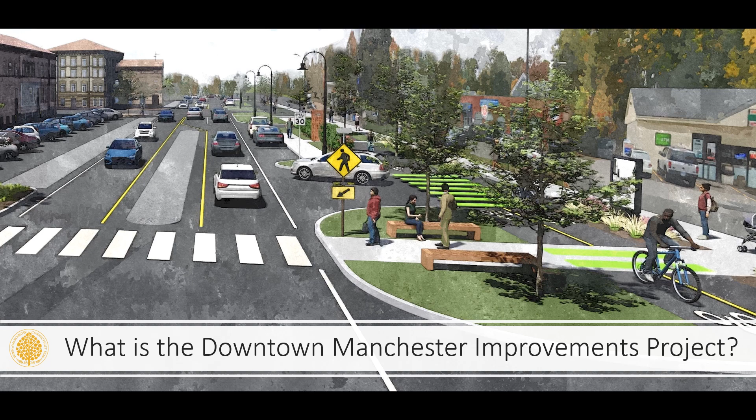The Downtown Manchester Improvements Project, also known as the Downtown Streetscape Project or Downtown for All, is the next phase of the town's recent efforts to make downtown and its adjacent neighborhoods even more vibrant places. This project is currently in the planning stages. It will represent a significant investment in downtown that benefits the entire community, complete necessary upgrades of the Main Street corridor, and address multiple community needs previously identified in various workshops and surveys spanning the past decade.

Over the past several years, the town of Manchester has engaged the public on opportunities and strategies for further improving downtown. These efforts have included conducting a townwide survey collecting feedback on recent improvements, facilitating a strategic workshop to identify priorities, engaging with the Downtown Special Services District, and gathering public input for Manchester Next, the update of the town's 10-year plan of conservation and development. Through these engagement efforts, town staff have received tremendous feedback on the state of downtown and its direction forward.

The Downtown Manchester Improvement Survey highlighted a desire for additional outdoor dining and general public seating while maintaining an adequate supply and distribution of public parking throughout the district. However, public feedback also indicated a general concern about pedestrian safety and the high speed at which cars travel in the area. Unfortunately, downtown is currently considered a high crash corridor and tragically has also seen bicyclists and pedestrians injured and even killed in recent years crossing Main Street. The town believes we have the duty and opportunity to improve.

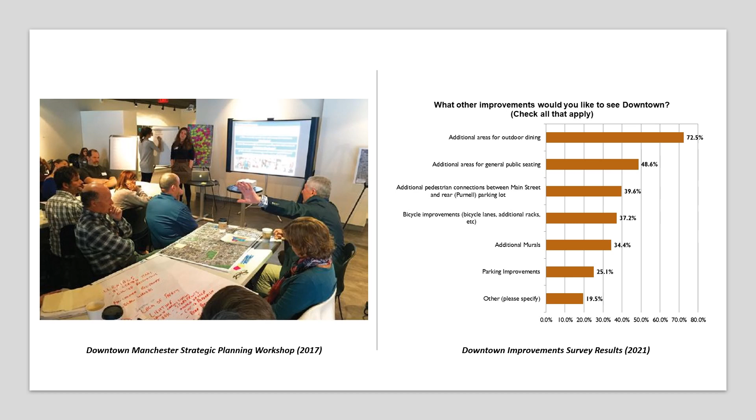Complete Streets is a comprehensive transportation policy and design approach that requires streets to be planned, designed, operated, and maintained to enable safe, convenient, and comfortable travel and access for users of all ages and abilities, regardless of their mode of transportation. The Manchester Board of Directors adopted the town's Complete Streets policy on October 3, 2017. This project puts this policy into action.

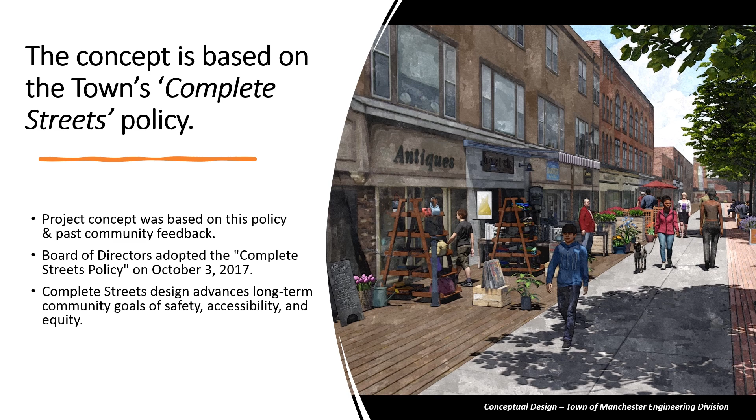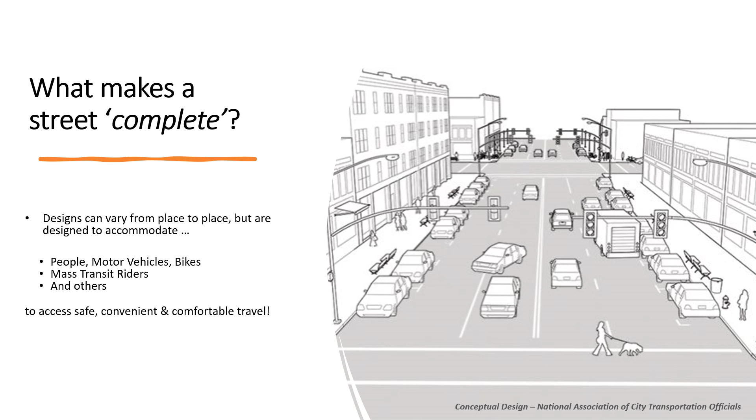The term complete references the inclusion of infrastructure that would make a street more accessible for cyclists, pedestrians, transit riders, and those traveling with strollers, walkers, or wheelchairs, while improving safety for drivers as well. The project will transform the Main Street corridor between Center Street and Hartford Road into an accessible, vibrant, and equitable complete street through a comprehensive design that includes traffic, pedestrian, and bicycle safety improvements, additional public spaces, and an enhanced streetscape complemented with strategic public and private development.

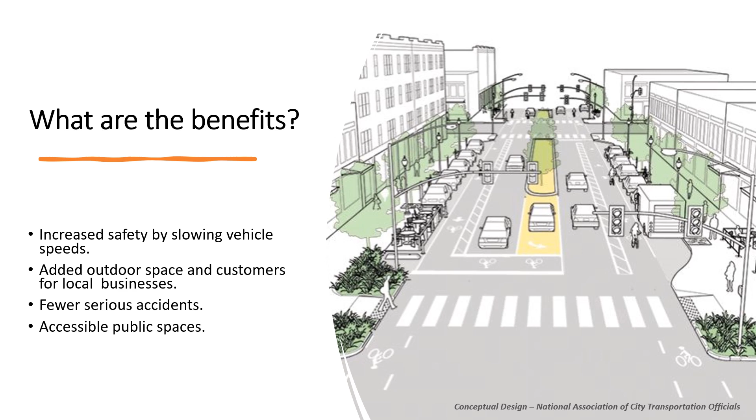The project intends to reduce the instances of serious vehicular crashes and slow vehicular speeds, add customers and foot traffic for local businesses, and increase the amount of accessible public space.

The foundation of this project is a road diet, which provides the opportunity to implement several other improvements. A road diet typically involves reallocating an existing 4-lane roadway to a 3-lane roadway consisting of 2 through lanes and a left turn. While counterintuitive, going from 4 lanes to 3 improves traffic flow in that those taking a left turn now have a dedicated lane to wait safely outside the flow of traffic. Those behind a turning driver will be able to keep moving instead of having to stop or worse, swerve into the other lane and risk a potential crash.

The proposed road diet includes on-street parking changes in some areas, but a mix of parallel and diagonal spaces will remain. Importantly, the project is expected to result in no significant change in the total number of parking spaces in the corridor, and the current concept design includes a small net increase in the number of on-street spaces. Currently, downtown has almost 1,000 public parking spaces. All these improvements are intended to make downtown a safer and more accessible place to be for all residents, whether they travel by car, foot, public transit, bicycle, stroller, or wheelchair.

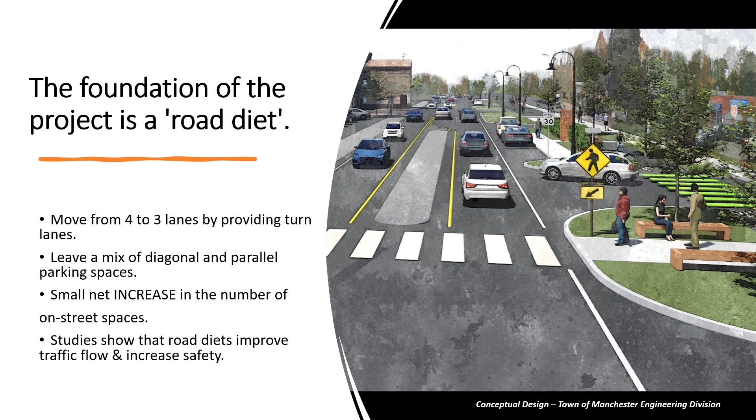The project concept includes a cycle track, or 2-way bicycle path, that is separated physically from vehicular traffic and distinct from the sidewalk. The track will be located on the curb side of the parking, in contrast to bike lanes, which are typically between the parking and the travel lane.

Despite the great interest in cycling to or through downtown, bicycle journeys are currently challenging, with no dedicated lane, diagonally parked cars backing out of spaces, and the prohibition of cycling on the sidewalk.

Installing a cycle track that runs along downtown Main Street would create a southern connection to the East Coast Greenway, a northern connection to Center Springs Park and the Cheney Rail Trail, and offer the ability to connect safely with other routes in the future.

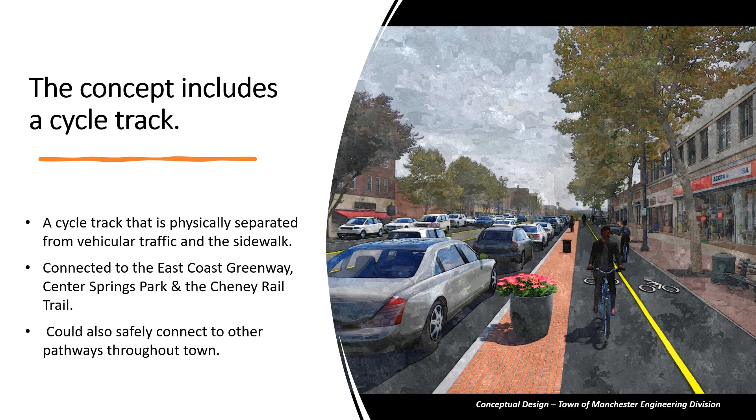Additionally, 2 roundabouts are proposed for the intersection of Main Street and Center Street, and the intersection of Main Street and Charter Oak Street or Hartford Road.

The proposed roundabouts allow for vehicles to travel counterclockwise around a center island to turn onto the desired road. The roundabouts would allow for consistent movement through the downtown corridor, which also reduces carbon dioxide emissions from idling vehicles and reduces the severity of crashes when they do occur.

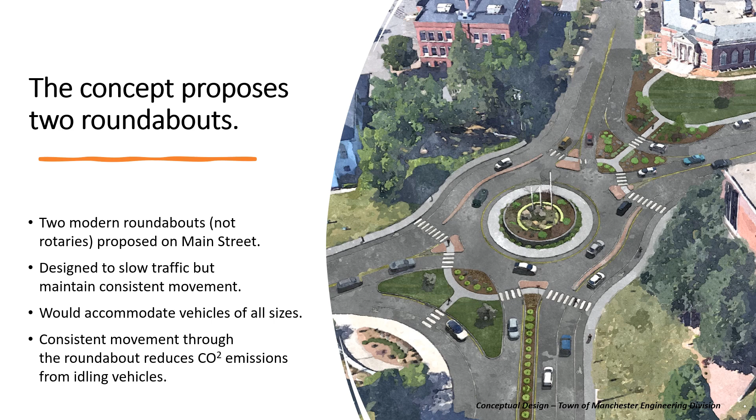Roundabouts can vary in size, but the proposed Manchester roundabouts will be larger than others that exist in the area. They will allow for vehicles of all sizes, including emergency vehicles, buses, and truck and trailer combinations.

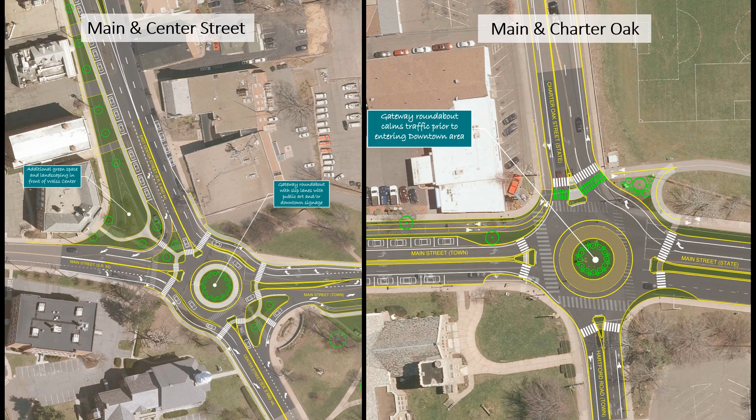Most importantly, roundabouts are designed to slow traffic, making downtown safer for everyone. Slower vehicles significantly improve safety for both vehicles and pedestrians.

Another critical piece of the project is to replace traffic signals downtown. The signals are reaching the end of their useful service life and must be replaced in the near future. This project proposes to replace them with connected, coordinated traffic signals, which can synchronize traffic movements so that cars stop less when traveling.

While the first 2 pieces of the project will intentionally reduce vehicle speeds, the coordinated signals will allow drivers to get from one end of downtown to the other in a similar amount of time. Vehicles will move more slowly, but traffic will flow more smoothly, with fewer stops and no need to drive around someone taking a left turn.

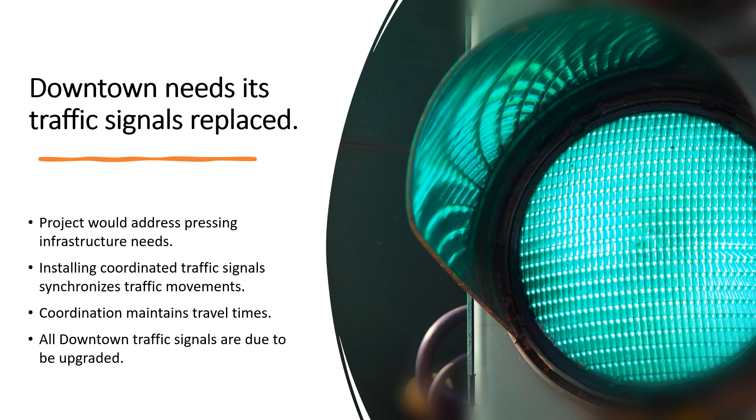The main elements of the project work together to help traffic flow consistently down Main Street. In addition to traffic safety benefits, the road diet offers a rare opportunity to enhance the streetscape and create additional public space in downtown, making it a more interesting and vibrant location to gather, do business, and socialize.

By reducing the road width, certain sections of Main Street will be able to significantly expand the width of the sidewalk, creating additional space for more outdoor dining, sidewalk sales, food vendors, and other creative commercial and social activities.

The addition of native plantings and more street trees will provide shade and environmental benefits while beautifying the area, allowing Main Street to thrive economically, socially, and naturally.

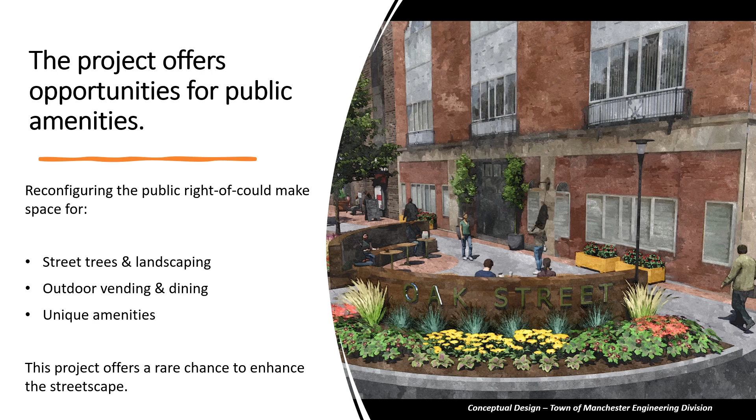The next step for the project team is to collect more feedback and input that would further the design of this concept. The project team has already begun engagement with groups like the Downtown Special Services District, Manchester Youth Commission, Manchester Road Race Committee, the Sustainability Commission, and others.